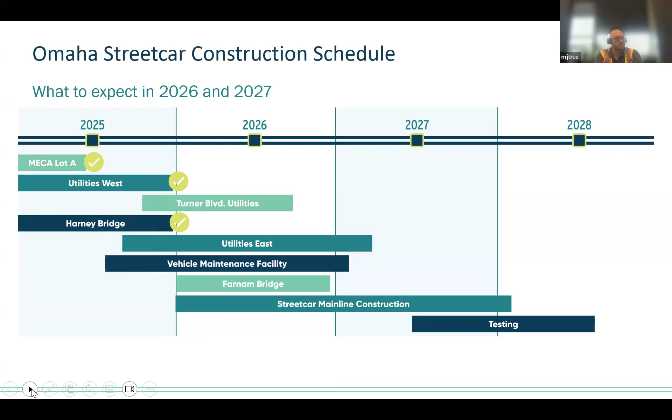And with that, we'll kick it off to our streetcar projects. Over to Steve.

Thanks, Mike. So yeah, bridges, like Mike just talked about, these are cruising right along. We got the bridge deck poured before CWS. We're working through the heat. Really, the biggest things coming up on this project—the deck's already up, looks like a bridge.

We're working on finishing up the railing, finishing up the appurtenances on either side of the bridge. So you're going to see that happening through the end of the month—you're going to see it really come together, the railing, the fencing, things like that.

Major work coming up is the intersection of 29th on the west side of the bridge, which is going to go into closure for a period of 9 weeks. That is to finish the water main and sewer work that needs to happen through there. So in roughly the same timeline that we have remaining on the bridge, that intersection is going to be closed. That intersection has been heavily restricted for quite a while, so I don't know that it's really a new impact, but it will be fully closed for the next 9 weeks as we finish making all those connections for everything we brought through the bridge, tying the system together and getting ready to open up traffic through here. That'll be great here in the next couple months.

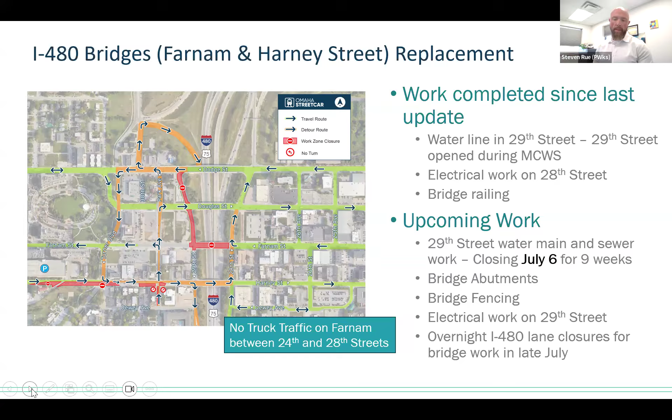Moving on to the East Utilities package. This package, we're continuing to work to the west. A lot of you in this corridor have seen our utility crews coming through, and now pretty much everything in that blue shaded area to the east has been turned over to Kiewit or is soon to be. So we're seeing a lot of track construction happen over there, which is a good indication that the utility work in those areas is done and we're moving on. Right now, the heaviest work is between 17th and 20th, but we're seeing work extend all the way out to the bridges and the interstate.

To reiterate some of the points Mike made at the beginning, coming down Harney right now, we have our electrical contractor, some sewer work in there, working all the way back to the east. There's some water main work occurring back there too.

We kind of have a very interesting slalom pattern, so please be very attentive as we are moving through the work zones. I drive that way every day, trying to make sure traffic control is up and clear and people know where they are and are not supposed to be. But please pay attention — I've seen some people follow trucks into work zones. I know that can happen, but it is very dangerous, so just make sure you're paying attention.

I've also seen a number of people driving the wrong way in the last couple of weeks. So we're doing our best to make sure signs are visible and we're posting additional signage, but please be very attentive while you're down there. We don't want anybody working on the projects to get injured, but we also don't want you or any pedestrians down in the corridor to get injured. So just be very attentive to the signs.

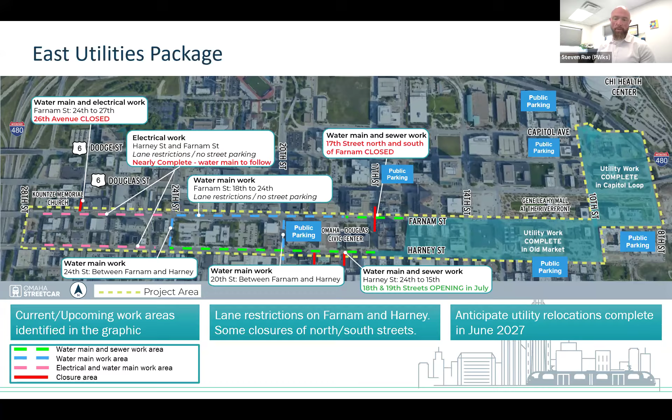Moving on to Turner. This package is going great. We're back up to the surface at what we were calling the Big Ugly, the very deep, large manhole that a couple months ago we said was like three giraffes deep. At this point, they're going to finish up the little bit of water main and sewer work along here, and you're going to start seeing a lot of paving coming through in the next couple of months.

Between now and October, a lot of that paving is going to get put back. You're going to see them start restoring the sections of trail that are out, and some temporary grass and or mulch come in, depending on where it's at. Some of that paving and grass work will be temporary, so if you live there and you're used to seeing grass or something specific in an area, it may not get reestablished exactly like that, since main line is going to come right back in behind us. We're trying to be financially conscious in how we restore this.

As this project goes along, we have some water main and sewer work to finish up, but we're pushing into the phase where you're just going to see a lot of paving happening in these areas as we put everything back and get ready to close this project up and work towards substantial completion, which we expect late this fall.

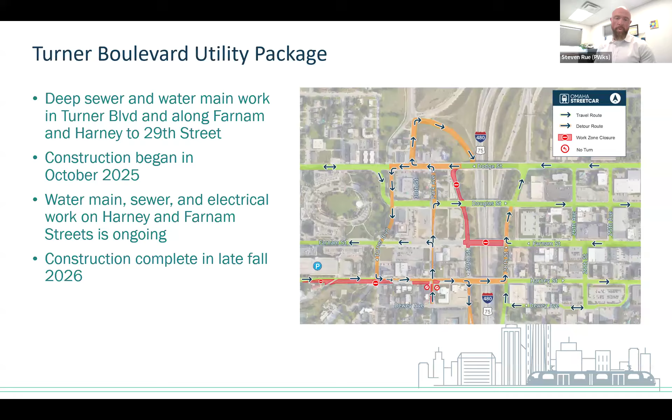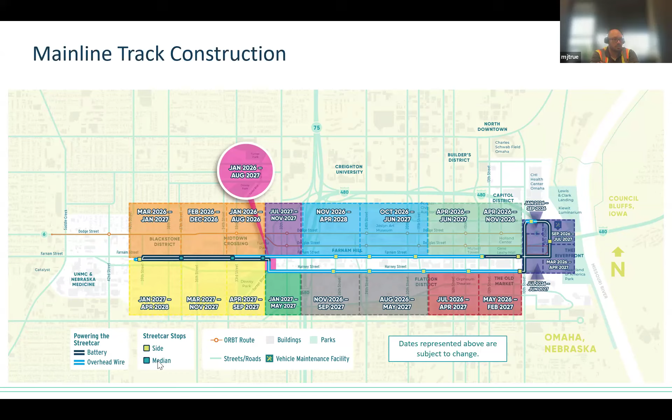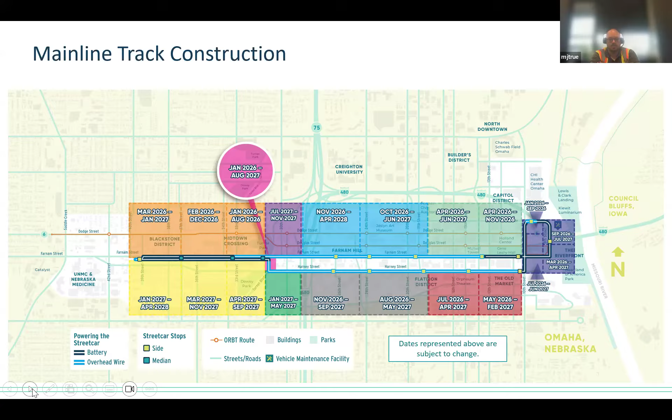Thanks again, Steve. So the main areas we're working at are out west in the orange, we've got the east loop in the purple. We'll be doing some additional work here along 10th Street — you'll be seeing before the end of the year that bridge get milled and overlaid and rails laid across there. We're also into the green and red zones, and we'll be focusing the rest of this year on the east end, trying to make sure Capitol's closed up, and also getting along Harney pretty heavily, as that's where we intend to create a test zone so we'll be ready for cars to start arriving next year.

We're going to call this phase 5 here, from a little bit past Turner Boulevard going up the hill. They've actually been paving and encapsulating around the track. They still have the sections around the track. They pour the actual track slab, and then the approach slab between the existing pavement and the track slab is the next part they're going through. We're probably going to see that 7-1 area. We're going to still say August, but we're starting to look at that opening up here in the next month or two, which is getting exciting.

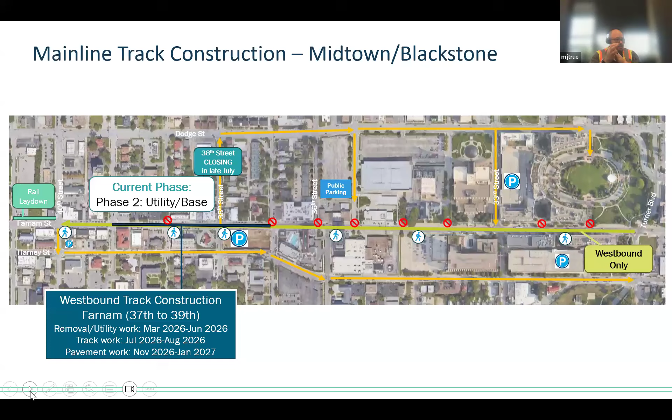East end of the project, Capitol Loop. We still have Douglas Street as two-way for a westbound exit, and you can take a right out onto 10th Street. 8th Street is still closed from Douglas to Farnam. You can come down Farnam, as I previously mentioned, pretty much everywhere else. Farnam's westbound — this is the one little section where it's east.

We are going to still recommend everyone, while we're down here in this Capitol Loop area with everything going on, if you're at the CHI for events, when you come out, particularly from MECA Lot A, we're going to tell you Riverfront's probably going to be your better access drive, just given the timing of lights and how everything else is already going to be congested. Going out the long way probably is going to wind up being very similar.

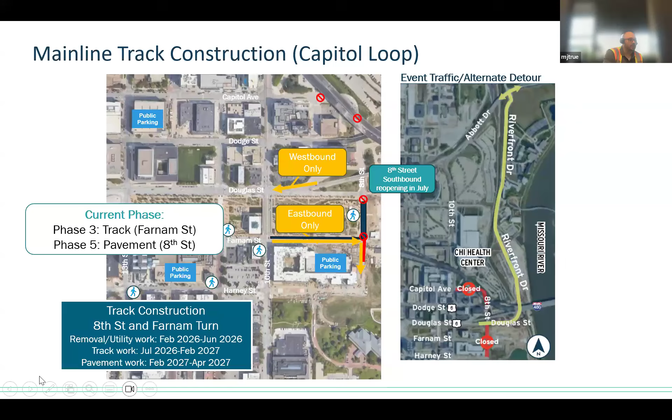The area between 8th Street, Douglas to Farnam, and then along the north side of Farnam, as it says here, we're in track along the actual Farnam side, and then 8th Street's actually been paved, and we're going to continue to pave that back, meter it up, and we're looking forward to opening some crossings there in the near future.

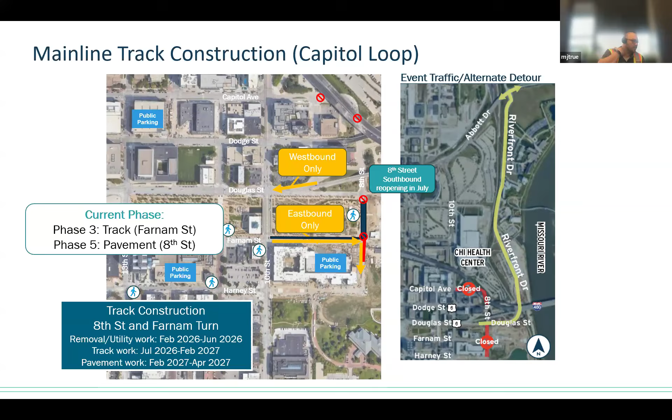As previously mentioned, 10th Street, this is actually going to extend, from my understanding, all the way to wherever you see the existing rails at, and then it'll go all the way down to Harney, so we're going to get the full stretch in there. This will include some work on the 10th Street Bridge that may have to include some intermittent closures at times for safety and the overall work. That's still more than a month, 2 months out, but that work is going to be part of this — upgrading some of that infrastructure on the bridge.

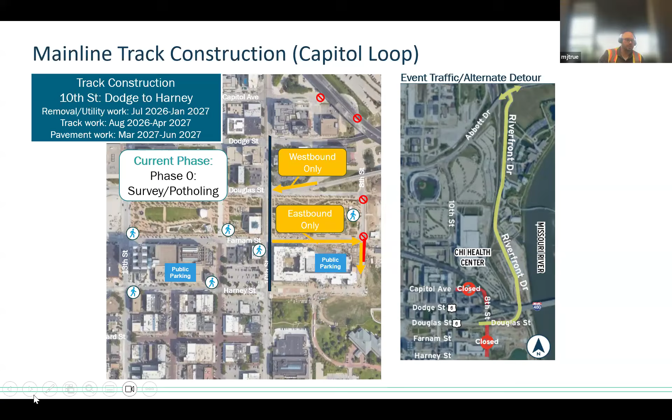In the downtown area, 10th to 14th on Farnam, we are in the track phase. If you go out there, you can see it's pulled into place, and it's going to get cast in. We're also working on the stop near 14th as well, and that'll run through basically the rest of this year. It's a little tight because they've got the rail laydown pile on the south side of Farnam as well.

The red indicators show you where streets dead end. The one on 14th and Farnam going north is due to the tower going up there. And then we also have the pedestrian access.

10th to 13th on Harney, we're going through demolition. They left 11th and 12th open during the College World Series to help with traffic. Now we've gone through, we're demoing that out and proceeding along there. They'll be through here at least Q1 of next year.

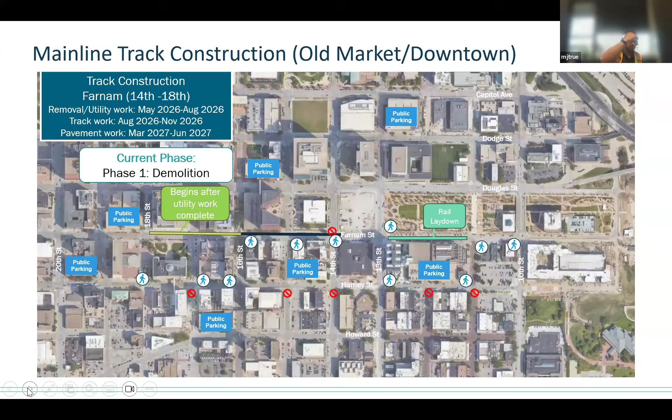We'll also be working along 16th. There's a reason there's a break there — we've got to do a power substation and upgrade work, going up from basically across from the First National Tower, down the street all the way to Harney, so you can have energy for both tracks.

There is going to be some rolling closures. There are some permanent closures left up now out to 15th, but there'll be some rolling closures beyond that, especially after the holiday. You're going to start seeing Kiewit's crews really get heavily out here and start doing the survey and pothole work that they're required to do all the way out to 18th along Harney.

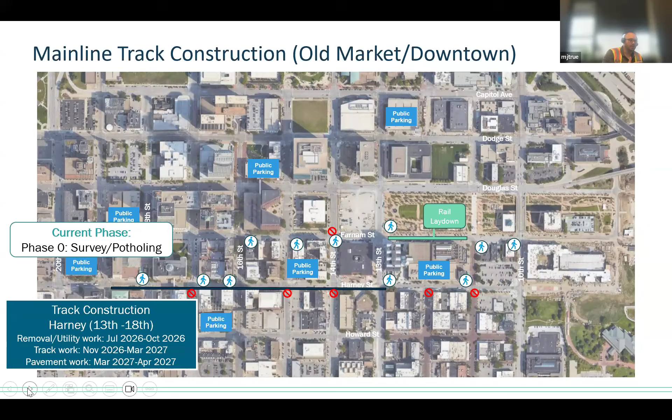And yep, there it is, the 16th Street. It'll be a phase closure through early fall this year. We're going to start at the south end along Harney and work our way north.

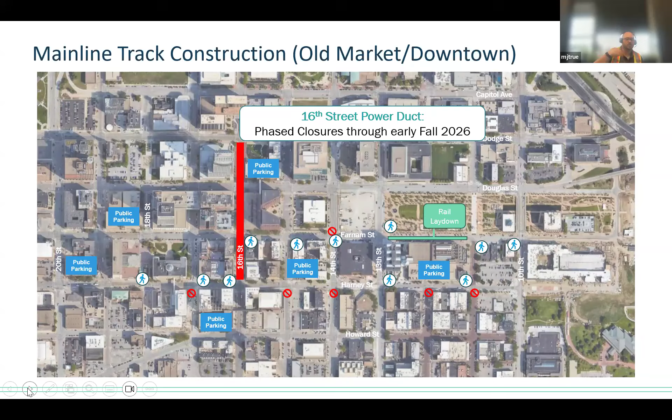Streetcar maintenance facility — this project's going along great. It might even be a little ahead of schedule, but it's definitely at least on schedule. Right now Kiewit is down in this area; if you look on the right where those vehicles are parked, there's a rock laid in between the concrete slab. That's been left out so Kiewit can come in, lay their track and rail, and do what they need to. Kiewit's in here getting the 3 bays prepped, a couple of specialty items like the turntable, and then they'll work their way out doing the track yard and back up to what they're working on around that northeast corner at 8th and Capitol, then follow 8th Street down.

So yeah, the vehicle maintenance facility is going along great. We've done one tour, and I believe there's an intent to show this off probably early next year, what it'll look like when it's completed.

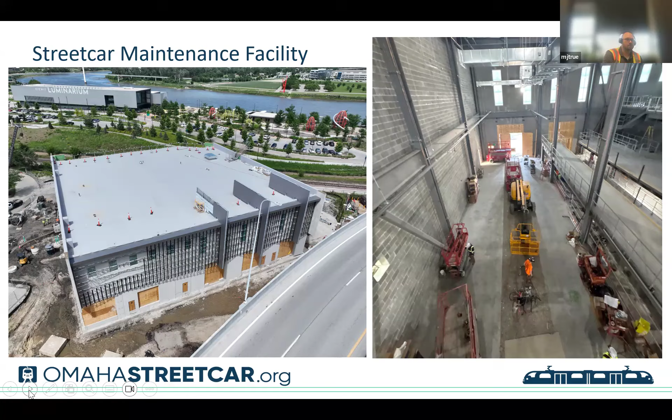Reminder to everyone, we have a construction dashboard, and you can go into the 6 main neighborhoods that we've identified. Gas work is thankfully all done and wrapped up. We're wrapping up most of our major utilities, and hoping to have a lot of it done by the end of this year. It'll probably bleed into Q1 of next year. Mainline has basically started just about everywhere. You can sign up for this, and in the communications they'll tell you some of the other ones, and keep up to date.

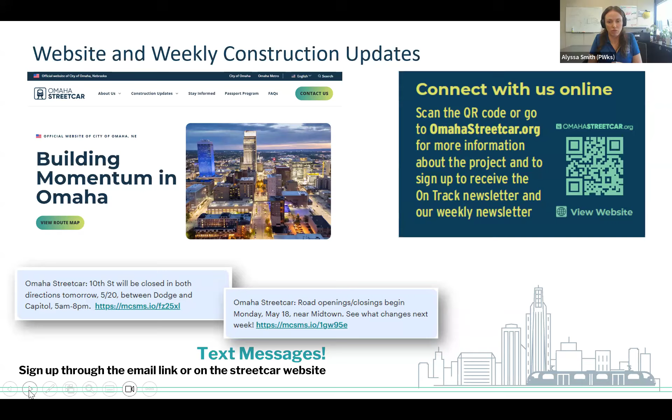If you would like to sign up for our text messages, that's an opportunity for us to send you quick little updates along the way. And then, of course, we also have our weekly newsletter in email format that's kind of in the middle between the detailed website version and our texts. Our emails are that middle ground level of information, broken down by all 6 neighborhoods.